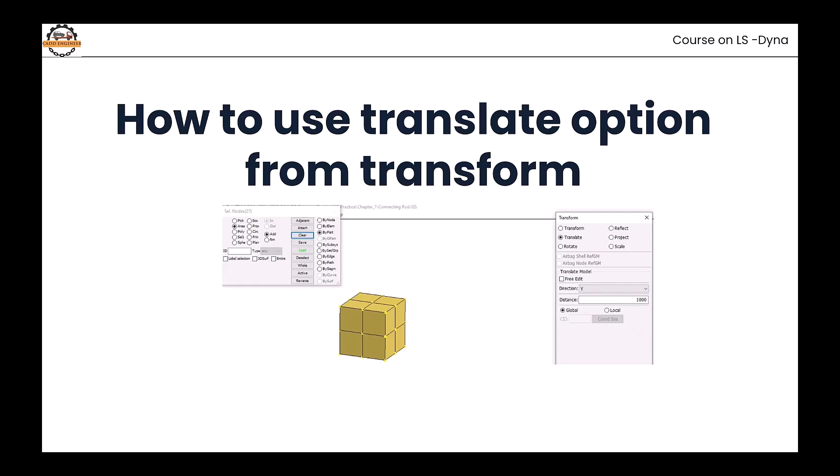Next, we are going to see how to use the translate option from transform. The transform has more options, not only reflect, some more options are there we can use. Suppose I want to translate this body from its actual location.

Sometimes it happens that the product I created, I don't want it at that location. I want to change it in X and Y directions. So you can select by part to take all parts. Now here you can define the direction which you want to move it. I'll take only X, Y, Z.

It's simple to understand. I want to move it in the Y direction. How much do I want to move it? I said it should move 1000 distance in Y direction. In positive Y or negative Y, you have an option here, you can locate in negative or positive. I said I want to go in the positive direction. So it shifted. Let me take a bigger change.

But if you want one more thing, you want a copy of that element also while transforming. In some cases we need a copy only. So in that case you can use copy and define if you want to make a number of copies. I said I require 2 copies, and you have to tell the distance.

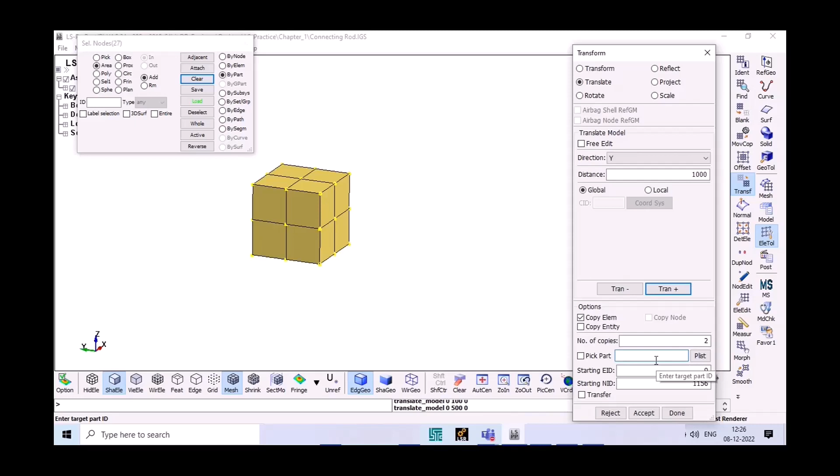Now here the part you can tell the number of part ID. We see only part ID right now because we have only one cube. If I give a part ID, it will only take one at a time, and put it in that second ID. So I said second ID, and I'll just click transfer. Got it, like this.

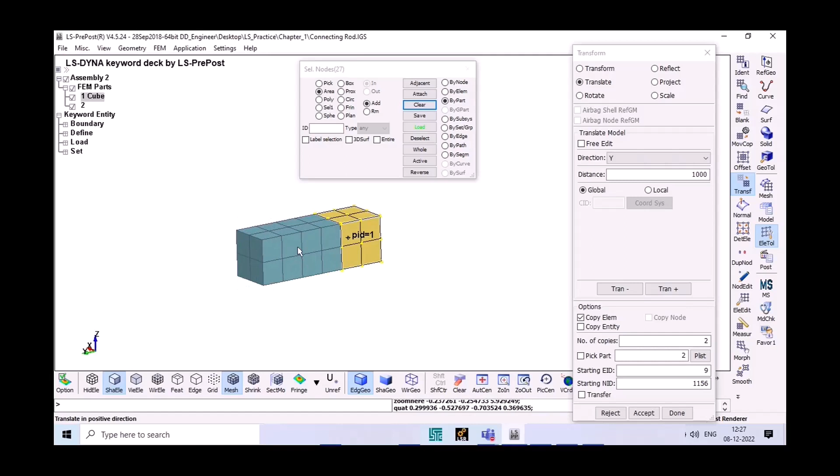Sometimes we have to make a bar or something and continuously make objects. We can make it, but that will be one different product. This is one part and this is one part. Suppose I want to keep them as one part, then we'll use move. Right now I used the copy option, that's why it's giving me a copy. Otherwise, if I don't keep a copy while translating, it'll only give you the move option.

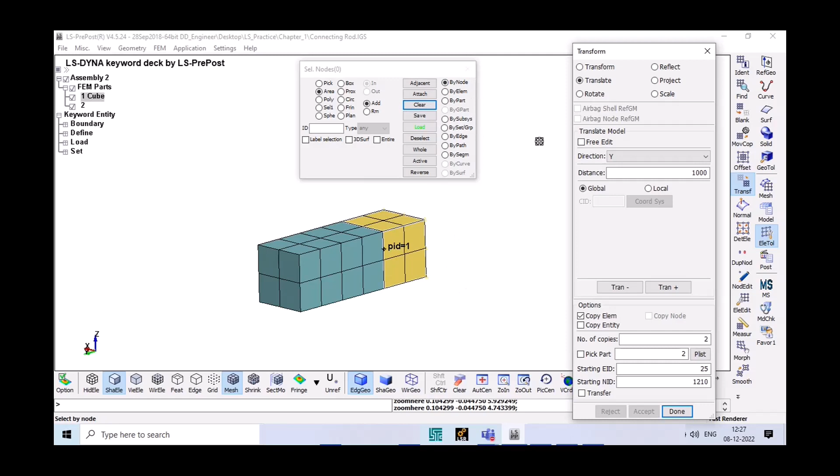Now suppose I require to take some elements from the faces, we can use element generation. Go to mesh, there's one kind of mesh option we can say, element generation. What kind of element do you want to generate? If you want to generate solid elements, you can keep it solid. Let me show you solid by element first.

I'll take it by element, propagation. I said these elements, I'll take other also. A 30 angle is there, and it's taking accordingly. So I'll put it one only. And element ID, fine, 25 is taken by default.

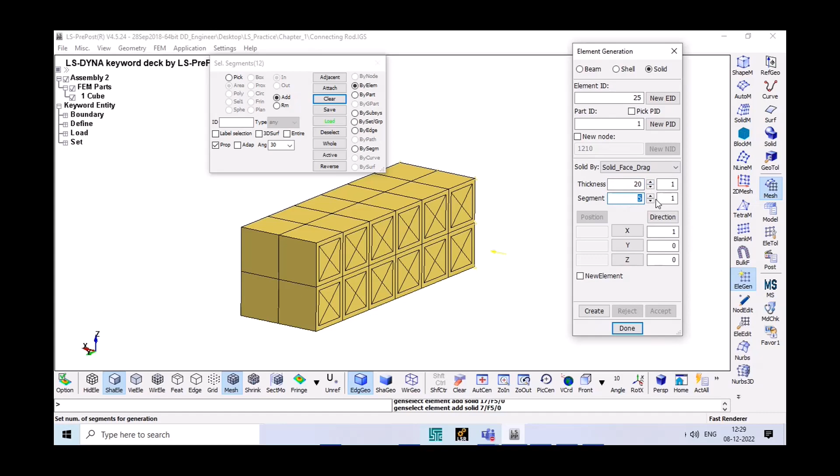What thickness do you require next, you're making a. So what thickness do you require? I said I required a thickness of 100. Initially what I've given, let me take a 20, and 10 I want to make it. Okay, try to create it.

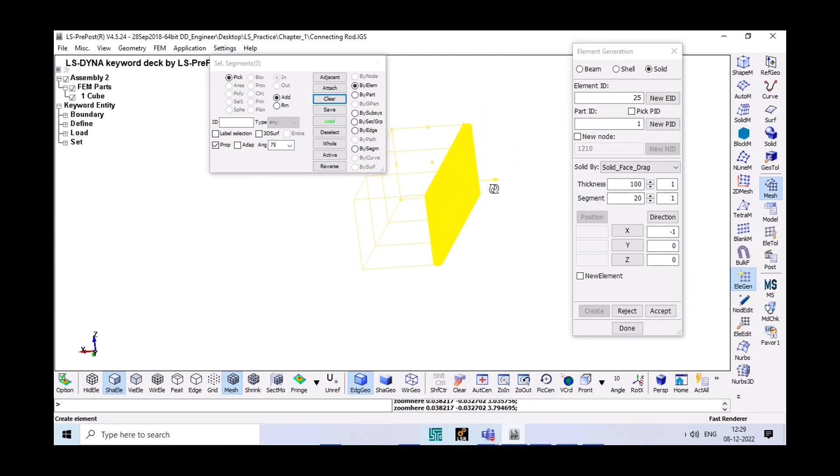You see here, direction you can change it. It's gone in positive, let me increase the distance also. It is 100 and I required 20 segments, negative x minus 1. Try to create it, select the elements. Go to pick again and take element. Try to create it. You see that it is coming this side. Accept and done. So I got solid elements.

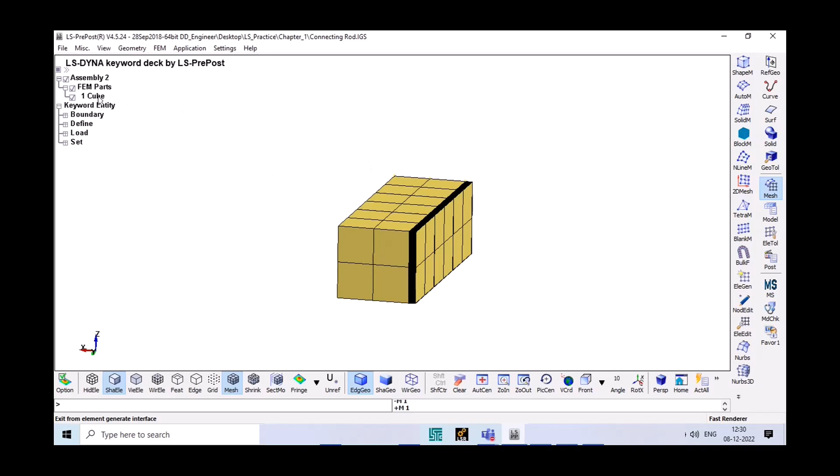But if I don't want to take a solid, I take a surface element and later I want to move it and all, I can do that also. So you can make it a new element. Right now I keep it in one body, so it's going to the same body. You can go to element generation again and define that I want to take shell elements. Part ID new, I take it 2.

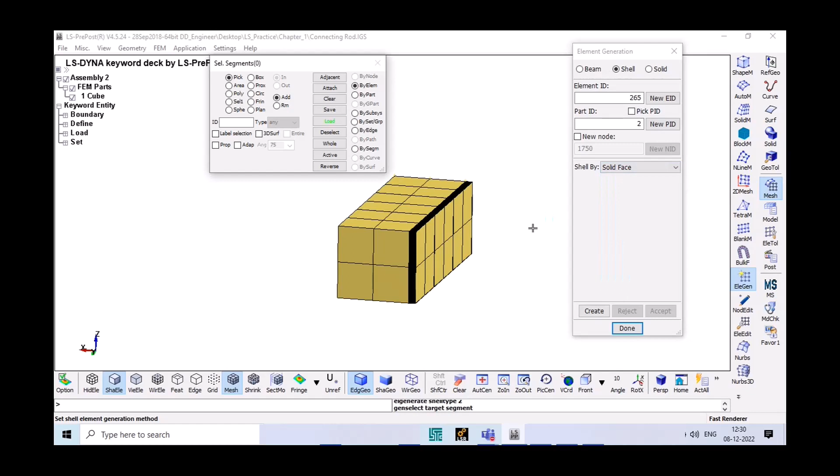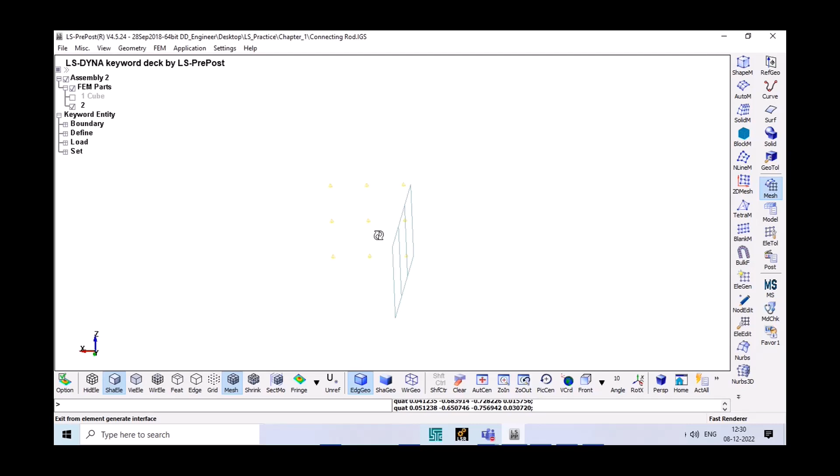From what I'm taking, solid, surface, solid faces, we're taking from solid faces. So we'll take by element and select it. Propagate. Try to create it. Accept it. You find that your 2D element is generated. Right now it's attached, but the attachment is not actually attached, it is just at the place with that face.

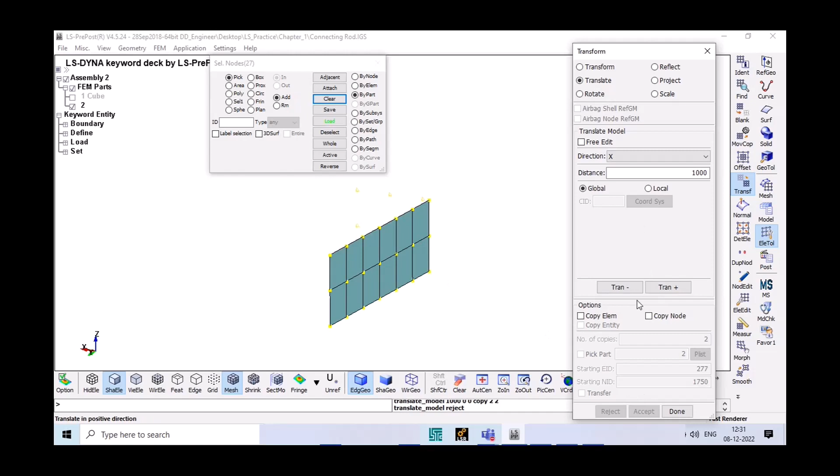So if you want to move it, you can go with the transform option again. Element tool, go transform, and we want to transform in the x direction, define the distance, translate plus. Select that, take by part also. Try it, reject it. We don't need a copy, we are moving the original object and translate negative. Like this, how much translate you want to do, you can do it, and accept and done.

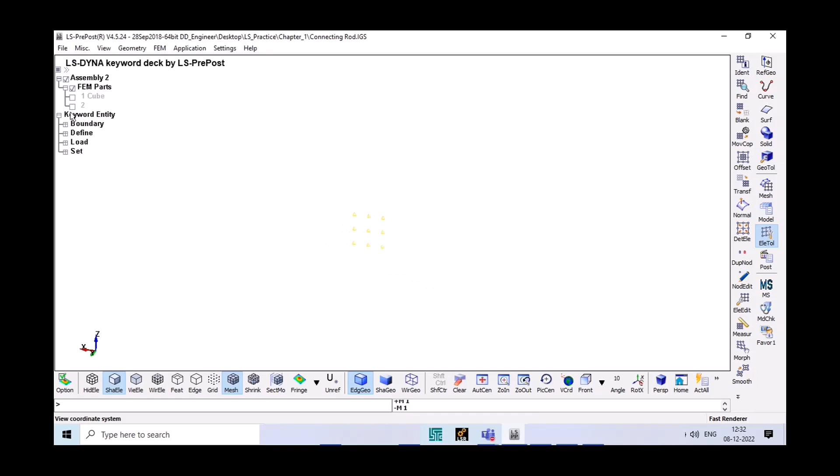So sometimes that is created in the same part, okay that is gone to the cube actually, not gone into the second part. Yes, it is there in the second part.

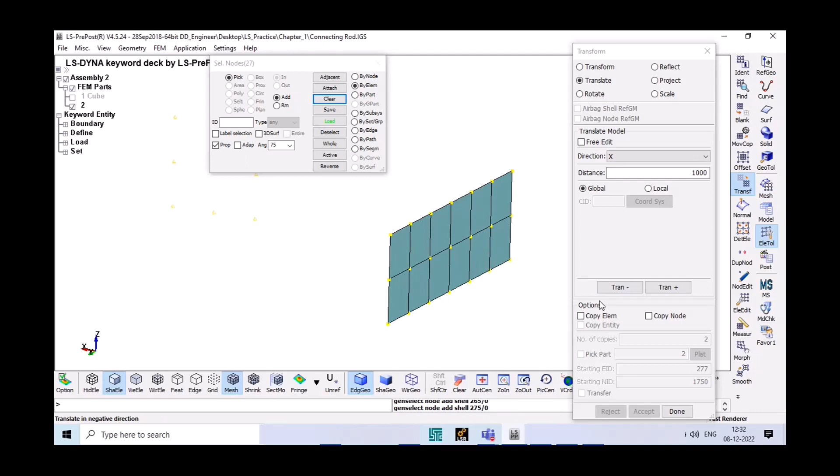So in that case, I think I have used something, transform, copy elements, not done, still it is moving. Fine. Take this again, by elements, by propagation. So if you do copy elements, then it will move it, otherwise original I choose, no, so original faces will be moved.

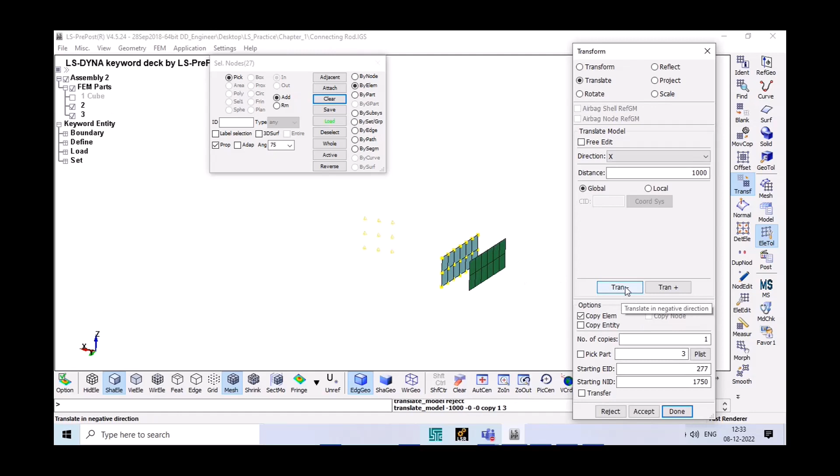Translate negative. How many copies? Only one, so later we'll delete that one. Part ID 3. Reject the earlier one and negative. Accept and done. Now what you can do is delete this one, there's a reference we have taken actually. Now you can see.

This is how you can generate elements if you require. Suppose I require this part to be hit by this plate. Instead of plate, if I don't know the location exactly, but I know the distance from this part, it will be easy making it this way. Or if you know the location, you can go with that shell method. You can make it by that method also. This is how we can do it.